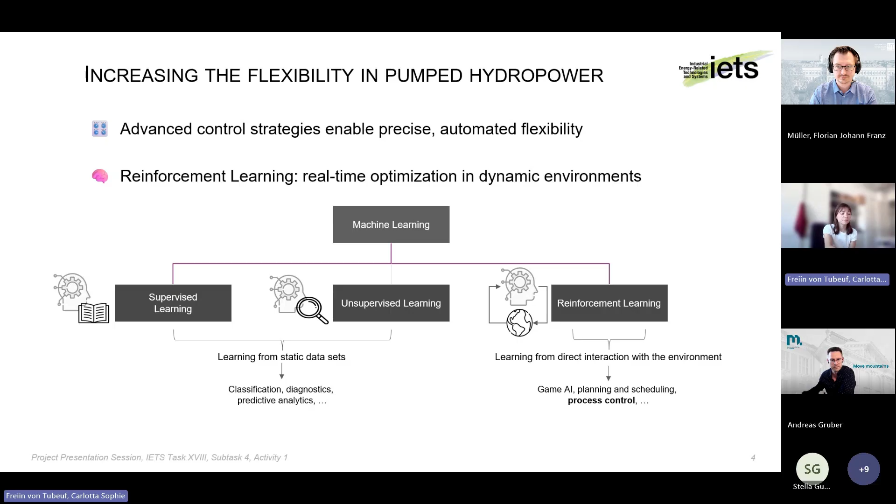This was brought up mainly by gaming, where we had a huge leap in reinforcement learning research a few years ago, and now it is gaining more attention in other fields, especially in process control, where we used it. How does it work? We have an agent that interacts with the environment. The agent, the neural net, the thinking thing behind it, takes an action that changes the environment, and the new state gets fed back to the agent, which takes a new action.

Together with the state, we get a scalar reward signal that tells the agent how good or bad this action was. Ultimately, the agent defines a policy, which tells it how to behave in a given situation. If I'm in state A, do action B. If I'm in state C, do action B also, whatever. You can imagine it a bit like a grid. The goal is to find the optimal policy that maximizes the cumulative reward we get moving through this environment.

To find this optimal solution, the agent needs to explore all the possible state spaces in this environment, taking a lot of random actions to find out whether it reaches the goal and maximizes the reward. The formulation of the reward function can also be tricky: on the one hand telling the agent where we want to go, what a good outcome is, but on the other hand not telling it too much of our knowledge, because we want to see if the agent finds a viable path we didn't think of.

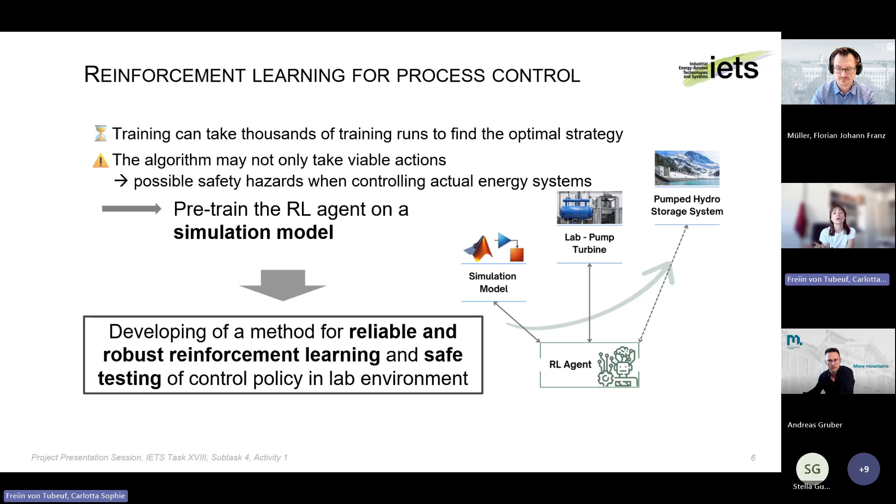And this is our concept for our project. We have this reinforcement learning agent where we first pre-train on the simulation model, then transfer it to a lab scale pump turbine, and then in the future transfer the already trained agent to the real pumped hydro storage system. So the goal for our project was to develop a method for reliable and robust reinforcement learning and for safe testing of the control policy in a lab environment.

And therefore we had, as I already said, this project RELY that was funded by the FFG and the call AI for Green. We had project partners from around the whole spectrum of our main goals. So we had experts from machine learning, the mathematicians at TU Wien, us as experts in energy systems, and also digital twins and simulating and modeling of energy systems. We had Evon, an automation software provider that helped us with establishing the connection between the reinforcement learning agent and the pump turbine in the lab.

Then we had experts from the energy systems themselves, the Tyrolean hydropower company, where we have the pump storage power plant that was the main model for our simulation. So their real world power plant Kühtai 1, I don't know if you know it, was the blueprint for our model. And experts on how to disseminate all of this to other energy systems as well, the VGBE from Germany.

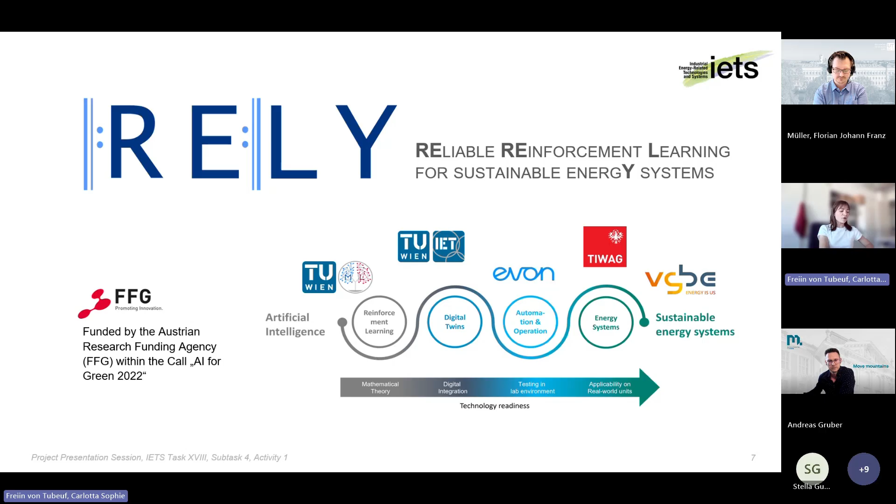Good. So the main concept that we developed and then also tested out was that we had first, as I said, the offline pre-training on the simulation model, and then, to be safe, so that we can have a reliable deployment of the reinforcement learning agent from the offline to the online control,

we had a step in between, where we transferred the learned policy from the simulation to a rule-based control system. So we looked at what the agent did in the simulation model. We abstracted this into a rule-based control, then operated this at the real test rig, and only after we found out that what the agent found is actually doable, we let the agent really online control the whole energy generating unit. And this was then the sim to real transfer. And I'm gonna present now the results for each of these steps.

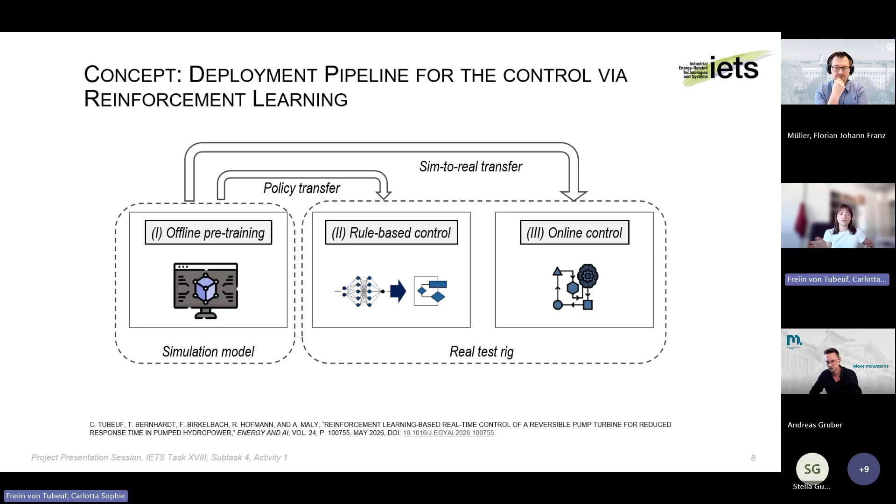The simulation environment that we used was, as I said, the representation of the pump turbine test rig at TU Wien, which again represented the real-world power plant from the TIWAG, Tyrolean Hydropower Company. It was modeled in MATLAB Simulink using Simscape, and we based our model on the pumping quadrant for the pump turbine test rig.

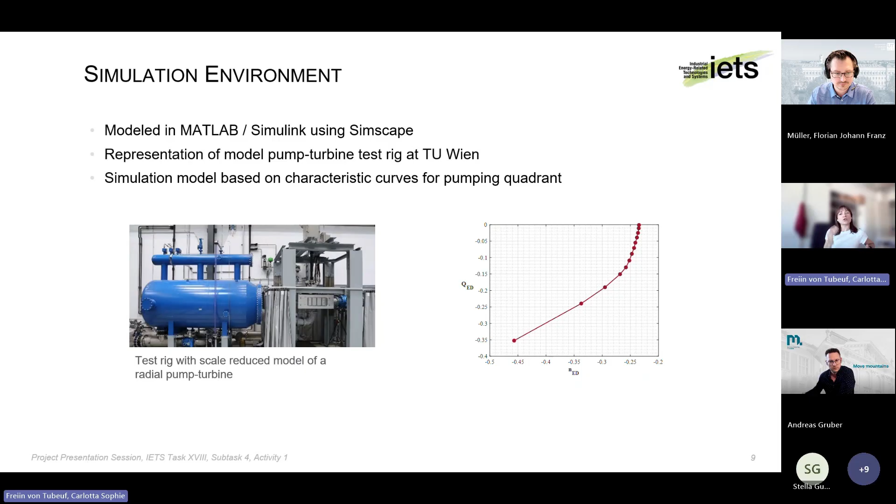So as I said, a pump turbine can theoretically be used in pumping mode and in turbining mode, but for our first use case, we used only the pumping. So the pump startup of a pump storage power plant was our first use case. This is starting from a standstill.

So you can see here the sketch of a typical pump turbine unit. During pumping, we have the water coming from the tailwater vessel being pumped to the headwater. And this here is the pump turbine, the runner, that rotates and therefore establishes pressure that pushes the water from the tailwater to the headwater. And the pump startup we want to accelerate, so we want to be quicker in being able to store energy from the grid. This was our first use case for the reinforcement learning agent.

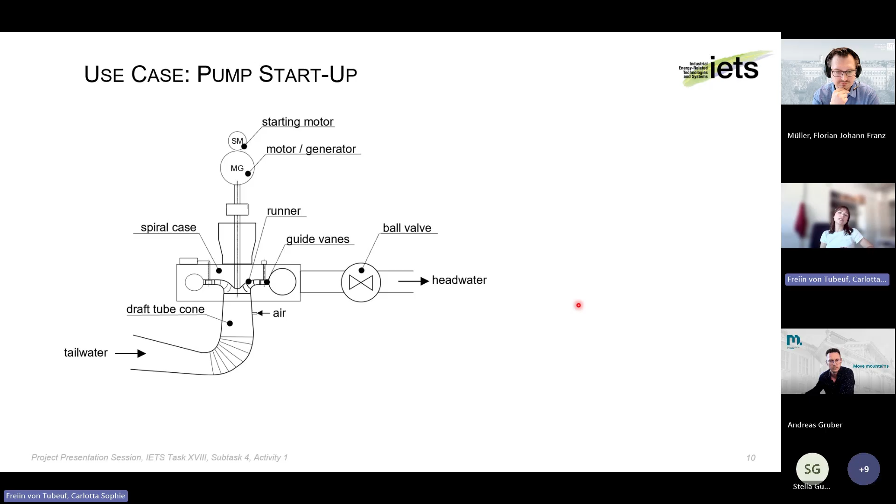So the agent needs some information from the environment. These were the states. So we gave it all relevant states that it needs to know to be able to characterize the current state, such as all the valve positions, the current flow rate, the torque of the shaft, and so on. And then it had 4 different actions that it could take at all times.

First of all, it could open or close this huge ball valve that prevents the flow from the headwater to the tailwater. So if this is closed, no water can flow through, and this needs to be opened to be able to pump water up. Then the second one was here, this air injection valve.

So what I didn't mention is that theoretically, when you're doing a pump startup in pump storage power plants, as they can rotate in both directions to either generate energy or pump water up, when we go into the pumping mode, the whole turbine first needs to be dewatered. So usually we have water in this runner, but for pumping we need to blow down the water. So we need to inject air. Then the water gets dissipated back to the tailwater.

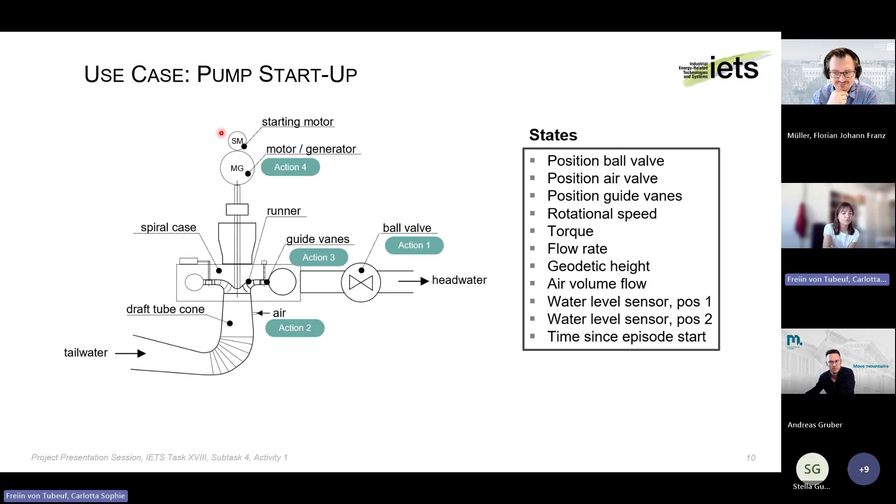First, you have everything closed from a standstill. You open this air valve. You want to blow down the runner. Then you accelerate the pump turbine until the synchronization speed is reached. Then you synchronize with the grid, close the air valve again, open this huge ball valve, open also the guide vanes that are responsible for the flow rate. And then as soon as the target flow rate is reached, the pump operation can start.

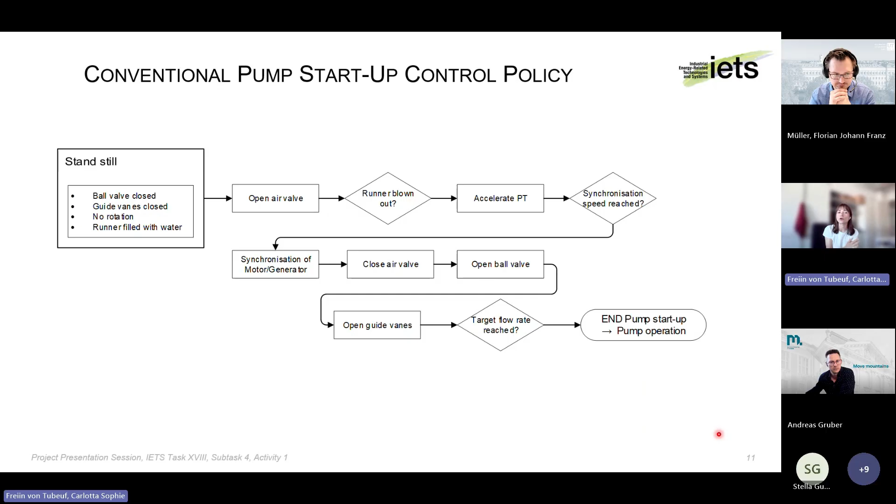And this conventional pump startup process was our baseline for what we want to see. Can the reinforcement learning agent also achieve control of the same process, or would it find something different? How could it find something different? We gave it a reward function, and the agent wanted to maximize this reward. And to incorporate everything that is relevant for how to operate a pump turbine, we have several terms in this reward function.

On the one hand, we want to have a reward for when the target flow rate is reached, and then a penalty proportional to a deviation of the flow rate. We have a penalty for the startup power. So if the startup motor needs a lot of power, we need to pay for the electricity that is needed to accelerate. So this is a direct penalty. Also a penalty if we use too much air, and also costs for the air compressor to compress the air that is needed for blowing into the runner.

We also included some wear-related penalties, and a penalty for valve actuations, because you can imagine the reinforcement learning agent doesn't know how to typically operate. What actually happened was that it was like, okay, open, close, open, close, open, close, just to see what happens. But in reality, this would not be very smart to do. So this is why we had to include also a penalty for valve actuations.

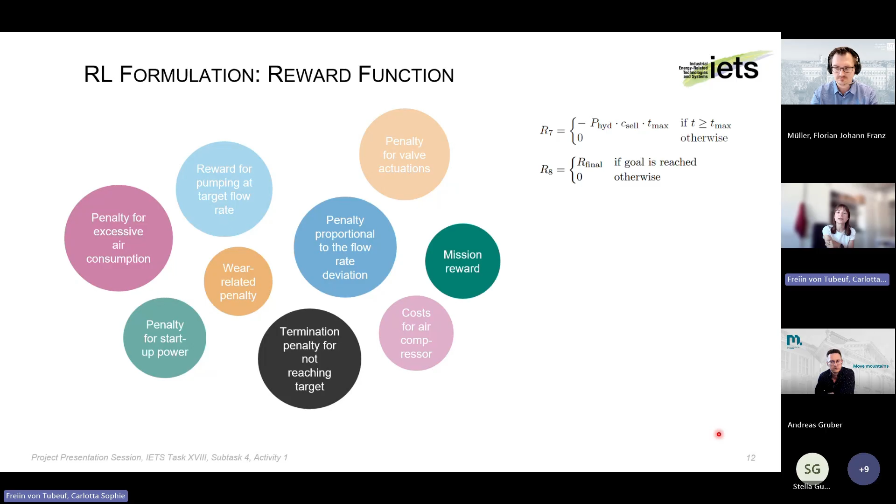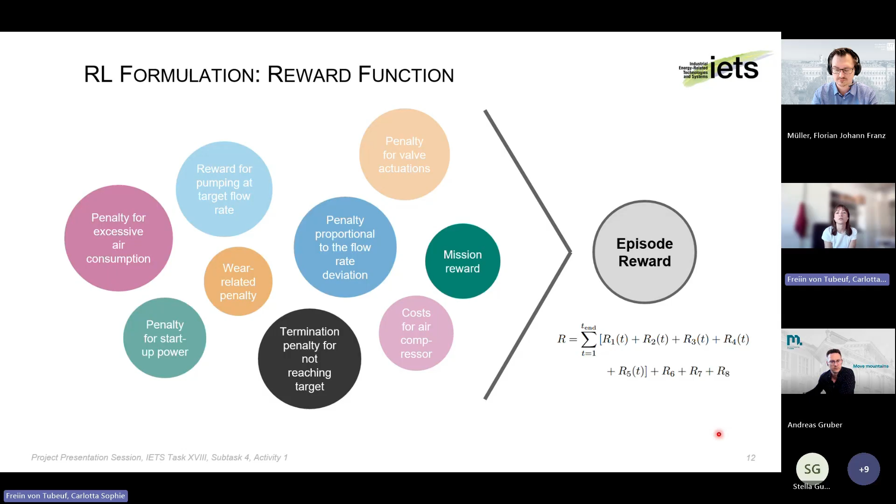And you see this iterative process of how we approached this whole concept of reinforcement learning. Then also a termination penalty if the agent did not reach the target of pumping operation in the end, but also a reward if the mission succeeded. And overall, all of this comes together in a cumulative episode reward, and this was being maximized. Therefore, we used a PPO agent, a proximal policy optimization agent, in Python, and connected it via TCP/IP communication to our simulation model in MATLAB.

And here you can see the training reward over the training episodes. In the beginning we have a quite bad reward, but quite quickly the agent converges to an optimum. The black dotted line that you can see here was the reward achieved when using the conventional policy that I showed you earlier. And we can see that the agent reached an even higher reward than that. The dark blue line is the average reward that we have in the end.

And when we compare the two, the conventional strategy and the reinforcement learning strategy, we can see that the startup duration was way faster.

So the main benefit, or the main reason why our PPO reward was higher than the conventional policy reward, is that we managed to synchronize earlier and to have the pump operation achieved earlier than with the conventional strategy. We also used less air in simulation, that you can see here, and the cumulative reward overall was higher for the reinforcement learning strategy.

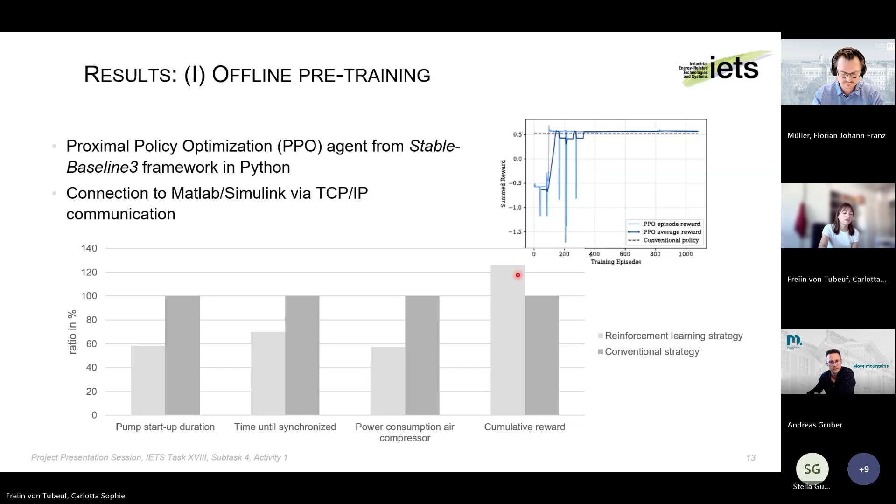So what was different in this reinforcement learning control strategy? As you saw before, in the conventional approach, we have a very sequential process of getting to pump operation, and the reinforcement learning agent decided to do a lot more simultaneously, what you probably wouldn't do at first thought. So it decided, while opening the valve, to immediately accelerate the pump turbine.

This would use more power on the startup motor, but as it accelerates quite quickly, you can still reduce the startup torque with blowing in air. And then as soon as half of the synchronization speed was reached, the ball valve was also immediately opened, so that we can have the target flow rate reached way earlier. For us, this was very insightful.

We also talked to the operators that we had in our project, and they were very hesitant in doing so, because that is not something that they ever did before. The reinforcement learning agent learned that from the training and the simulation model, and we were also hesitant, can we even do that? Are there not some physical limits that we didn't incorporate in our simulation model that will come into play later on? So this was a big question mark for us.

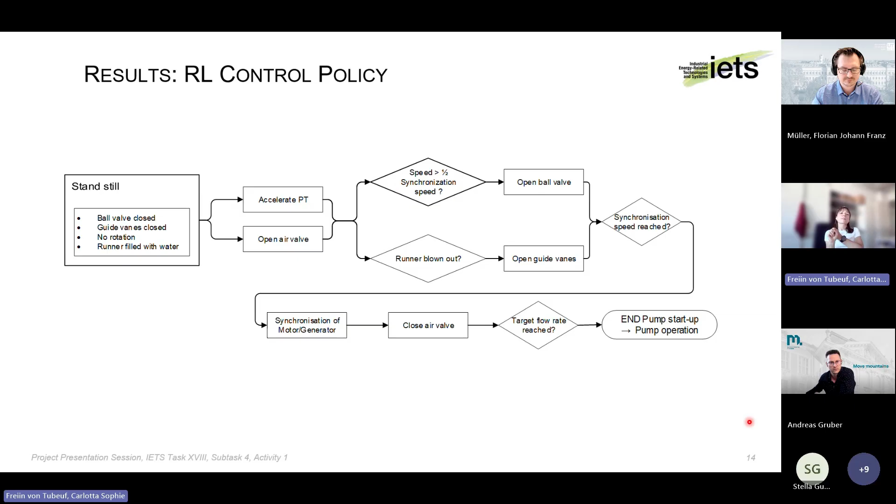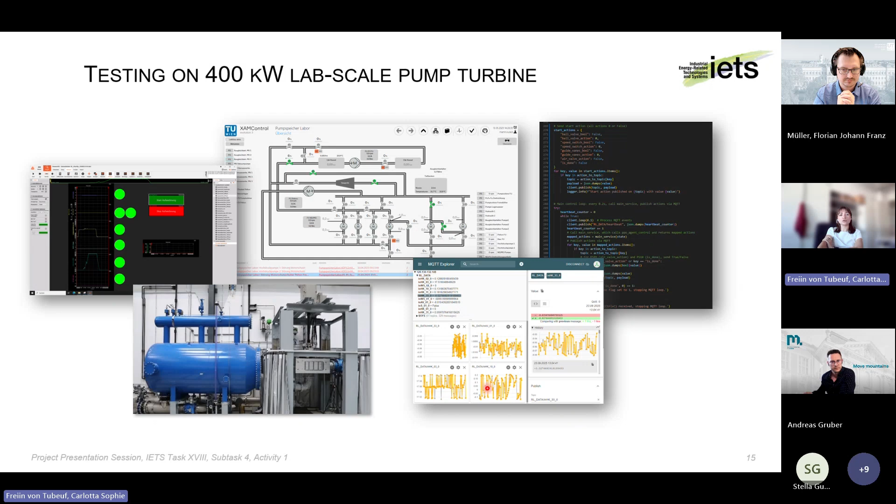So we decided, okay, we want to try it in our lab, but, as I already mentioned, we will do it in a rule-based manner before. So we translated this whole sequence into if A happens, then do B, before we let the agent control it online. So we tested it in our lab scale pump turbine. Therefore, we had this control system by the automation software provider that was in our project, and we connected it via MQTT. We had the control of our pump turbine in the lab.

And just quickly, we saw that the reinforcement learning strategy translated into rule-based control did work. We were a bit hesitant if maybe the torque is too big in the beginning, which it was not, or that maybe we cannot establish the discharge, and the discharge is the same as the flow rate. But basically, the experiments in our lab just confirmed what we saw in the simulation. So we were quite happy that it still worked and that we have the higher reward.

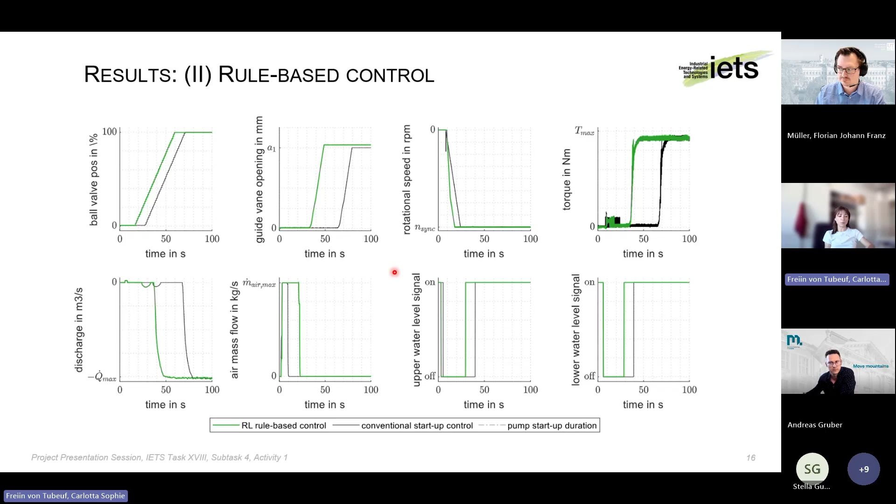But then we tried the online control, and there we can see some deviations. While it still opened the ball valve at the same time, we also have discharge established, and we have the speed coming to the synchronized speed here, as fast as with the rule-based approach. But what the agent didn't manage is to achieve the desired flow rate here.

And this is because the measurement signals that the agent got via MQTT were still a bit deviating from what it saw in simulation. And this is a problem, I guess, that you all know from digitalization projects, that reality in the end is still a bit different than it was in the simulation. However, we were still quite happy with the results, that we got a discharge, and that we are now able to work on deviations in the simulation model, also sensor signals, where the latencies are maybe too long for some sensors. So we will work on that in the future.

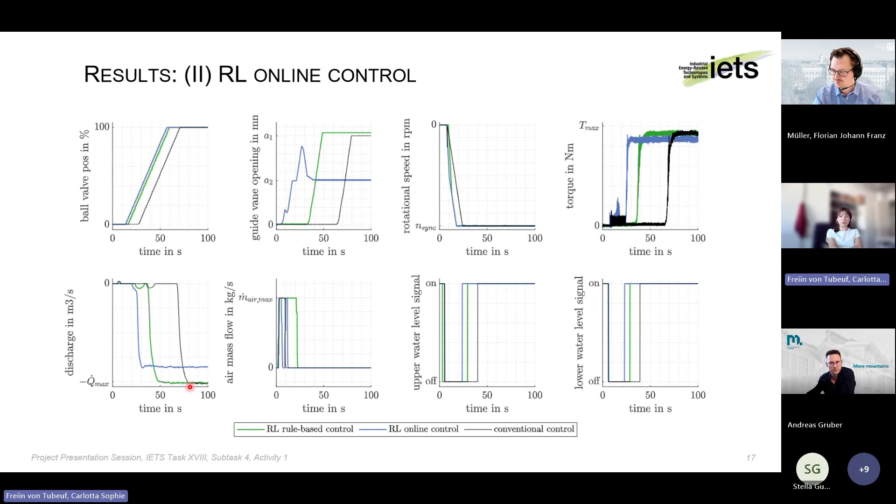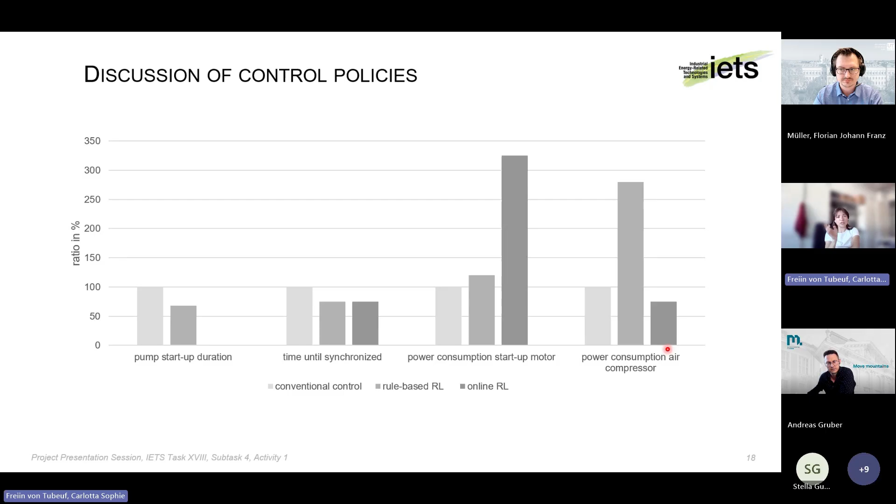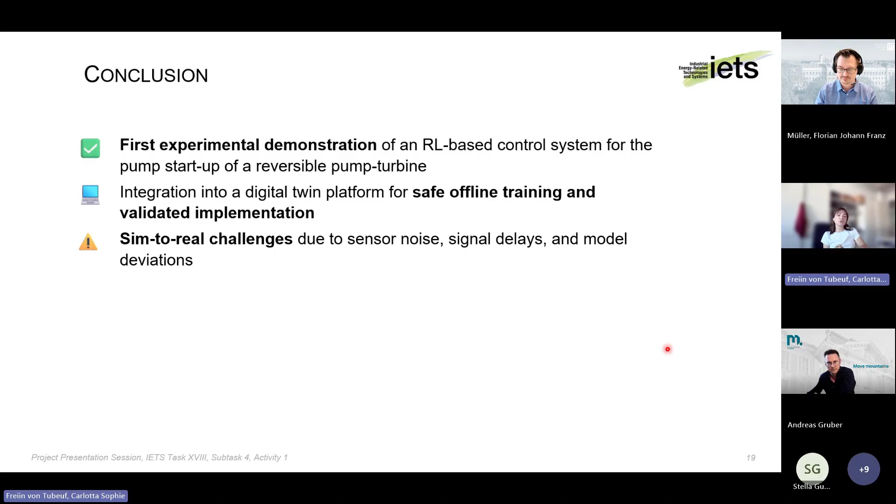We did integrate a digital twin platform for safe offline training and then validated implementation into a real world use case. But there were, as I said, some sim-to-real challenges due to sensor noises, signal delays, model deviations. However, our methodology demonstrates a practical approach to introducing reinforcement learning in safety-critical energy systems, and this must not only be hydropower, but also industrial energy systems.

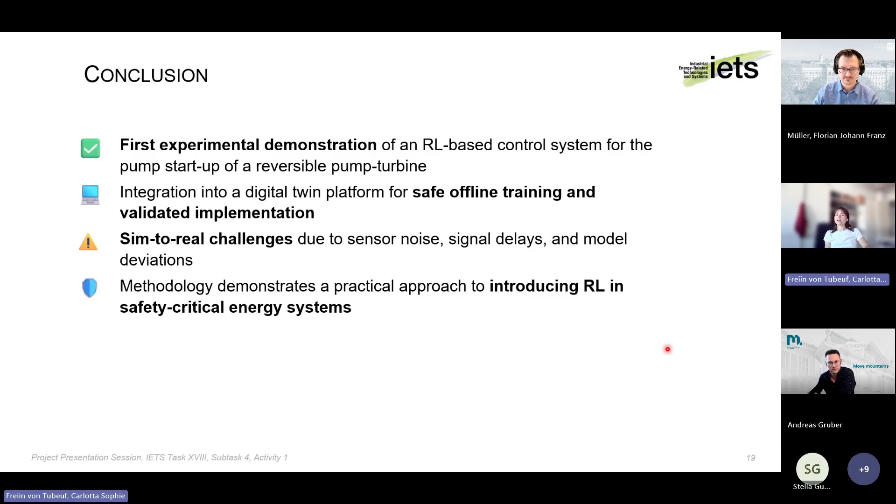Yeah, so I would be interested to know more about your challenges, maybe you had some insights into reinforcement learning already also, or generally in how to bring something from the model to reality. And yeah, if you have any further questions, I'm very happy to answer them.